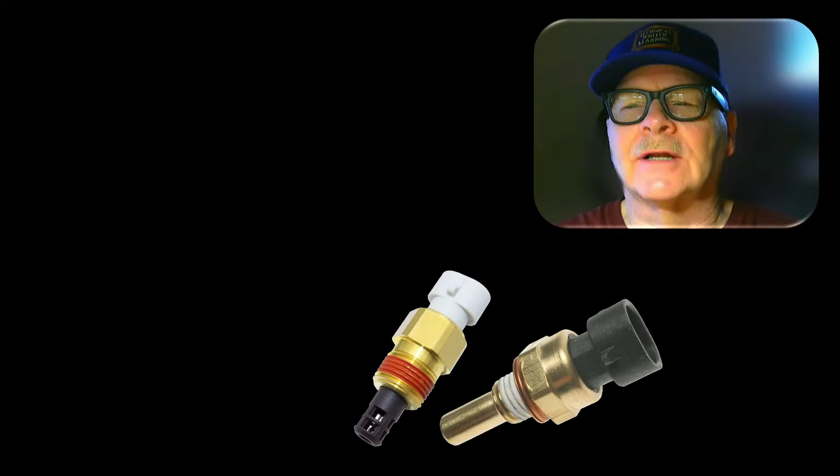Alright, we got question 1 here. Enhanced live data shows the IAT sensor reading 101 Fahrenheit and ECT reads 43 degrees Fahrenheit. The ambient temperature is 45 degrees.

What will the OBD2 generic data live stream display on the same vehicle for these two sensors? So basically what you're looking for, remember now, this is the enhanced, which is the OEM specific, and then your

OBD2, which talks on a different line and comes from a different ROM in the engine controller, is going to display something different. Your IAT is going to display 40 below zero in the OBD2 stream, but a substitution has been made up here, and that can actually cause wet spark plugs on a cold day. What's really interesting about that, if you got a situation like this on a hot day, it'll start normally

if the actual ambient temperature is close to this. But if it's a cold day and the coolant's reading 43, and this is substituted 101 for something that it feels like will probably work, it will wet the plugs and make a mess on a lot of these vehicles.

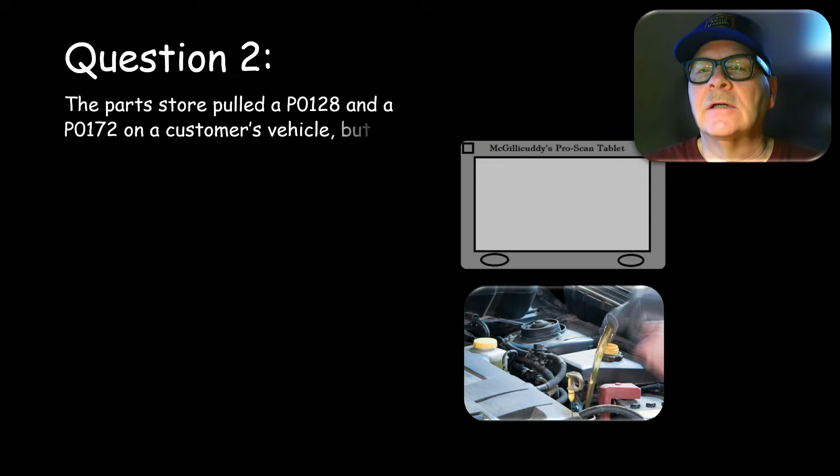Question 2. Part store pulled a P0128 and a P0172 on a customer's vehicle, but the customer decided to ignore the codes. Two weeks later, he changed the oil and filter but didn't do anything else. Immediately after the oil change, the engine wouldn't idle. He did everything right while changing the oil and didn't touch anything else.

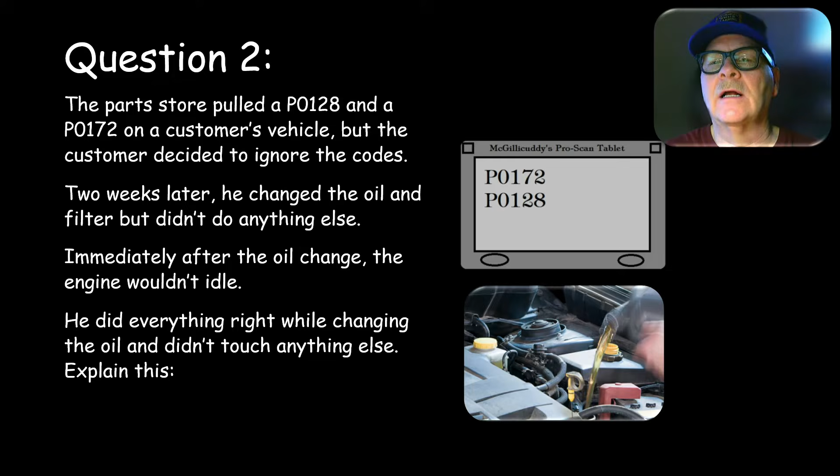Now, I've actually seen this situation unfold, and what happened there was the crankcase oil contamination with fuel due to the cold running engine. The PCV system was picking up enough fuel from the oil, so it had skewed the fuel trims badly enough. This was on a Chrysler, an early 90s Chrysler.

But the long and short of it was, all he did was change the oil after - the long story is, my dad called and said, I've got a power loss light flashing on your mom's Chrysler, and I went over and turned the key on three times and it flashed code 17. It meant it was running too cold, so I need to put a thermostat in it.

He said, well, I can do that. So he put a thermostat in it. Drove it for another week or two, and then when he changed oil, it wouldn't idle, because the fuel trims were so accustomed to drawing that extra fuel out of the crankcase that when the extra fuel wasn't coming out of the crankcase, it was like a carburetor out of adjustment, and it wouldn't idle.

And he called real frustrated. He goes, all I did was change the oil and now it won't idle, and I thought that was funny. I said, take the battery cables off. Ordinarily you have to clean the throttle body, but I said take the battery cables off. So he did that, and then when he put them back on, it idled just fine.

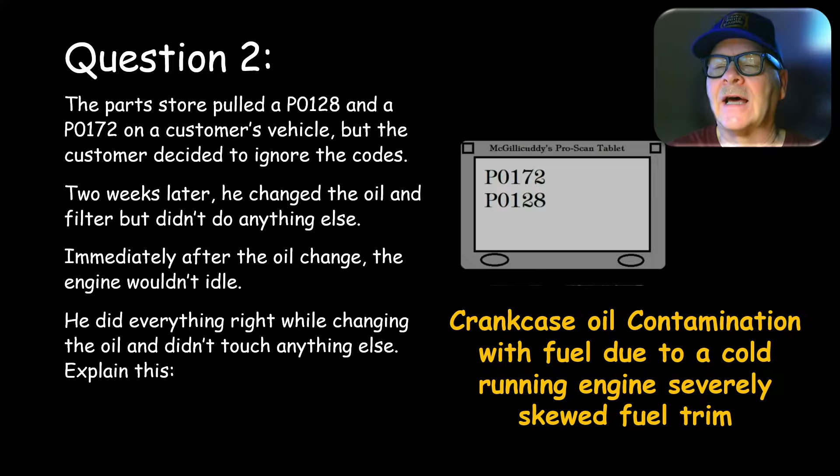Think about that. Formulate your answer in your mind. See what you see.

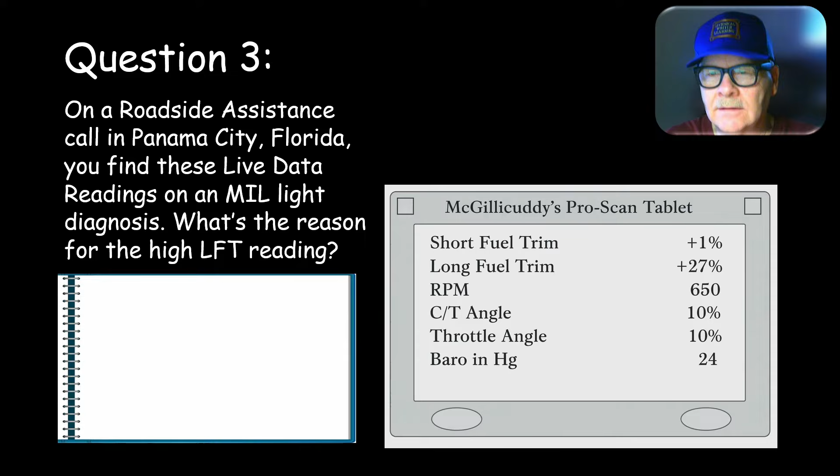Panama City is right there at sea level, right? So you got 29.98 inches of mercury there, and the Baro is reading 24 inches, which is high altitude. And so it's calculating fuel delivery for high altitude, and that's inaccurate for sea level delivery, but it doesn't know. So it changes its fuel delivery calculations for high altitude, but that's not enough fuel. And the oxygen sensors are saying, hey, what are you doing? And so they actually start sending - they drive the fuel trim up so that everything will stay in balance. So you got a skewed reading from your barometric pressure sensor.

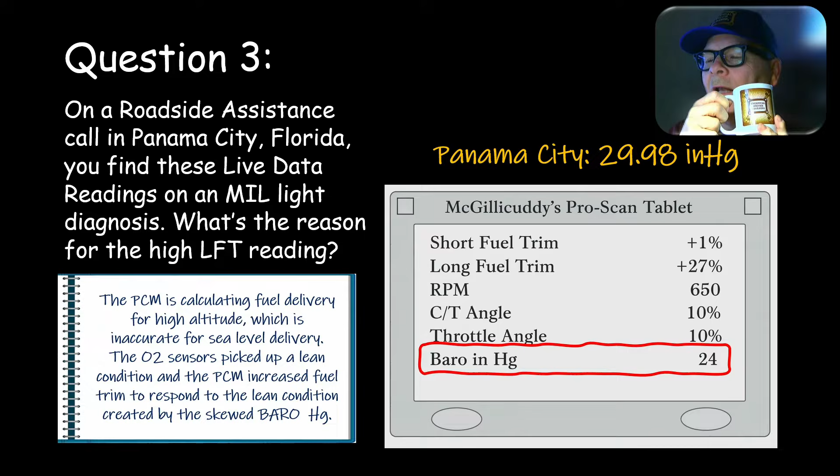Hold on a second. Oh, by the way, here's my coffee cup. You might like to see that, if you can see it. See my coffee cup? There we go. Look at that, it's got my logo on it. Anyway, there's only one of those, so don't get any ideas that I can send you one.

Alright, so the O2 sensors picked up a lean condition. The PCM increased fuel trim to respond to the lean condition created by the skewed Baro sensor.

And you understand what I'm saying here? Send me a question if you're confused about that.

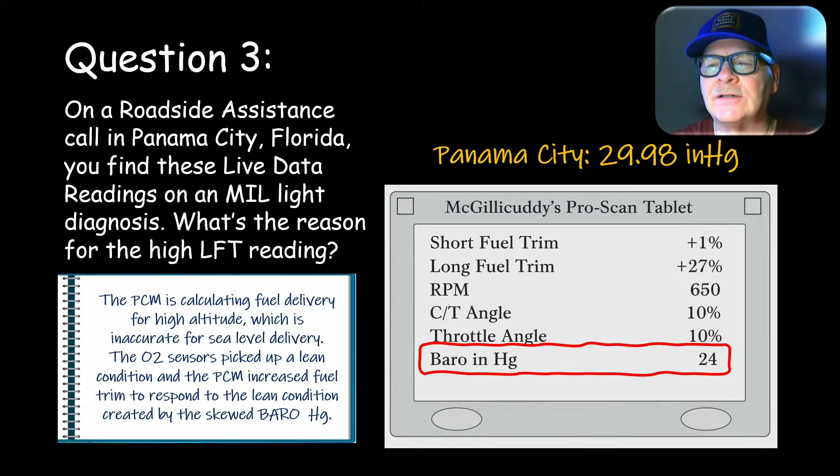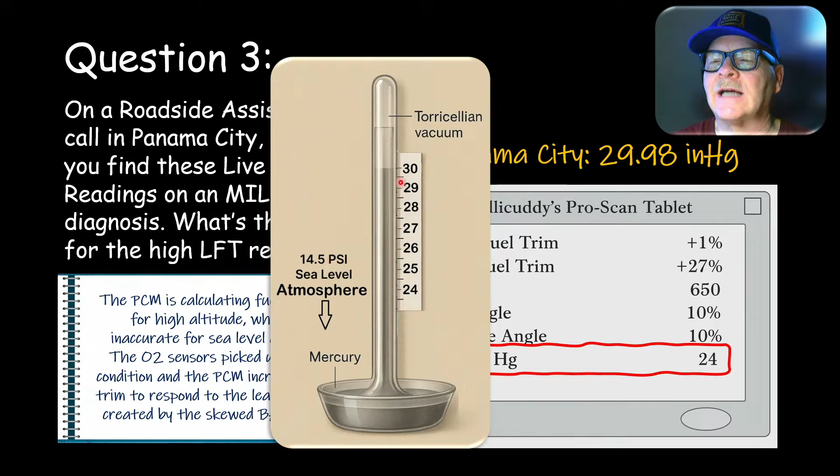This is basically, you got mercury, let's say it's a graduated tube here, there's a vacuum above the tube, and 14.5 psi at sea level is going to push this up. Notice this is roughly twice this - isn't that interesting? Anyway, it pushes that mercury 30 inches up in that graduated tube, and as the pressure decreases out here, that mercury goes down, so your readings are going to be lower. That's just the way that works.

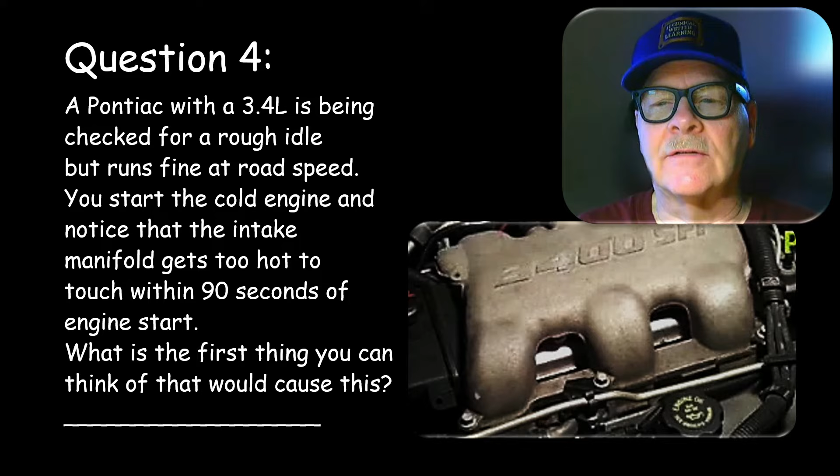A Pontiac with a 3.4 liter is being checked for a rough idle, but it runs fine at road speed. When you check the cold engine, notice the intake manifold gets too hot to touch within 90 seconds of starting the engine. What's the first thing you can think of that would cause that?

EGR flowing at idle. You got EGR flowing at idle, it's going to make the intake really hot.

I had seen this. I went to a tire store, and the guy that owned the tire store called me over, and he says, seems to me like they had to put an intake gasket on it or something, or an upper intake gasket, I can't remember. They had the upper intake off for some reason, and whoever owned the car had disconnected the EGR valve electrical connectors, because that was an electric EGR valve on that one. And they plugged them back in because they didn't notice they were unplugged, or if they did, they felt like, well, we need to put this thing back together right, so they plugged them back in.

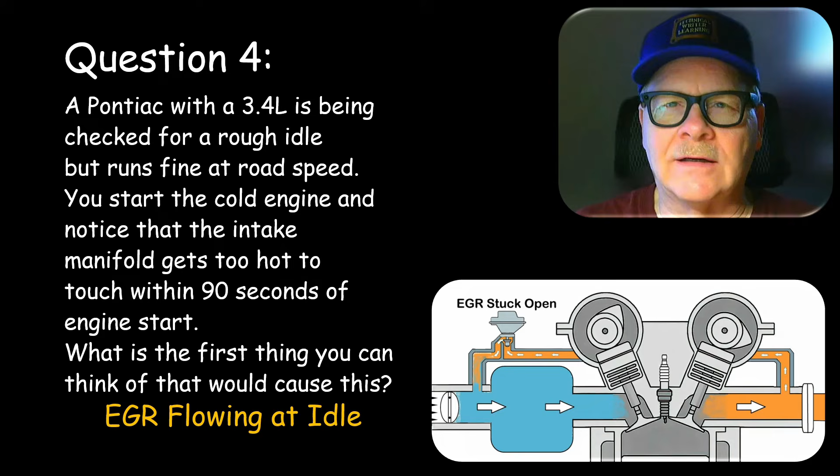And it idled really rough, and they were confused by that, so I went over there, and he said, let me walk out and show you this thing. It's been sitting out for 2 or 3 hours. So he starts it up, and I put my hand on the manifold, and it's idling rough, and the manifold begins to get super hot really fast. It was an aluminum manifold. And I said, that's going to be the EGR valve, and unplugged the EGR valve electrical connectors, and that took care of it. Now, I don't know why the EGR valve was being held open - obviously the engine controller was confused and was holding it open. And one way or another, he didn't care anything about fixing why the EGR valve was open. He just wanted it to idle smooth like it did when it came in for whatever other repair they did.

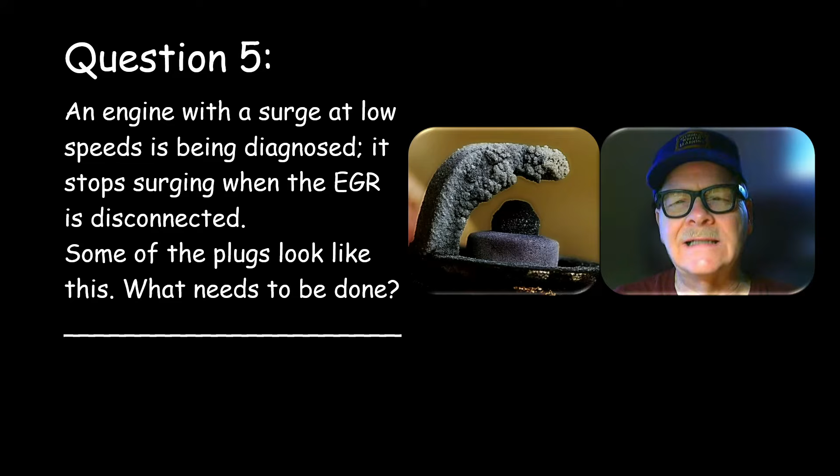Question 5: an engine with a surge at low speeds is being diagnosed. It stops surging when the EGR is disconnected. Some of the plugs look like this. What needs to be done? What do we need to do to correct this?

All right, what we got is leaking valve stem seals causing deposits to form on the spark plugs, causing random weak firing events. Now, if you have one that you park and it sits in the parking lot for, say, 30 or 45 minutes, and you crank it up and it fills the parking lot up with smoke, you got big trouble.

So that's a valve stem seal, that's what that is. If you let it sit and idle and it starts smoking at idle, it's a valve stem seal issue, particularly if you got puffy deposits on the plugs like these. The older GM vehicles used to be really bad to have valve stem seal problems, but the valve stem seal is right here, that's what it is.

Now, you're not going to have this problem on exhaust valve stem seals, because on an intake valve stem seal you have low pressure trying to pull oil past that seal all the time anyway. You got higher pulsing pressure in the exhaust going into the exhaust valve, so that one's not going to leak. As a matter of fact, you may even notice that some of your exhaust valve stem seals won't be the same type seal as your intake valve stem seals if you look at your kit. But one way or another, the seal is pretty important there.

One time we put some valve stem seals on a Dodge truck, and they happened to be crummy, cheap valve stem seals, and because of those lousy, crummy, cheap valve stem seals - where I did this at the college - they work their way up the valve stem.

Question 6: using the readings below, calculate the barometric pressure. Can you calculate the barometric pressure using these readings that you see here?

Let's see how I do this. 19.9 plus 9.7, and that equals 29.6. So that's your manifold vacuum and your manifold pressure, we talked about this on the last test. When you add these together, you're going to get your barometric pressure, whatever it is. That's typically the rule.

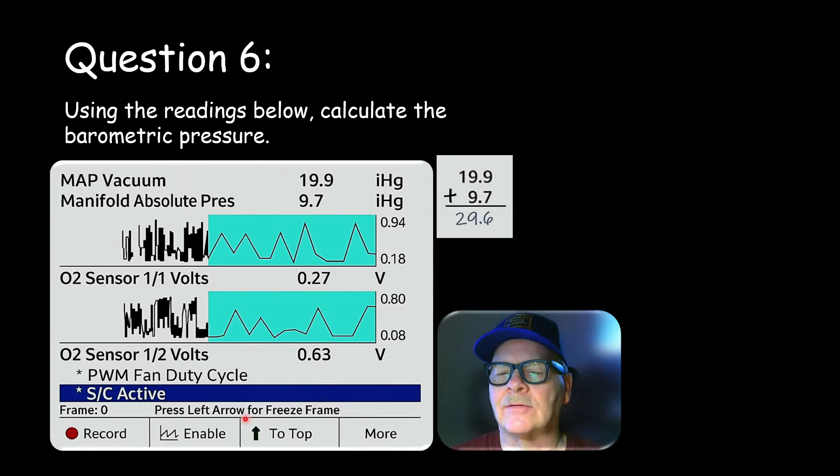Based on this live data, which emissions component is suspect? If you saw this, what would you think?

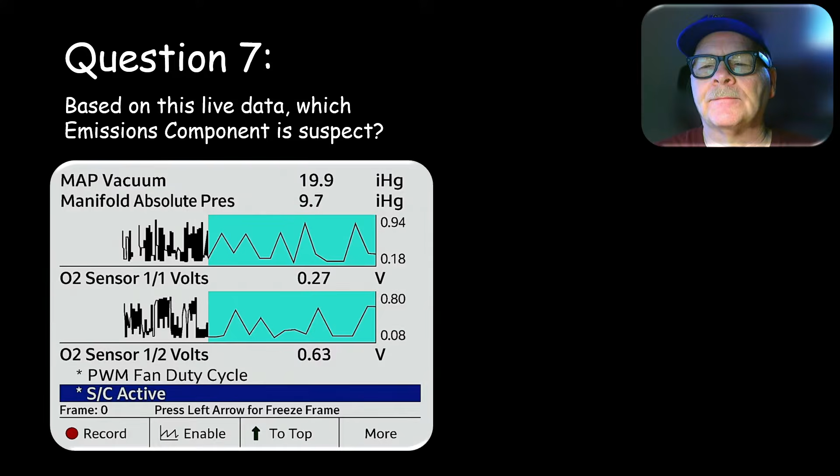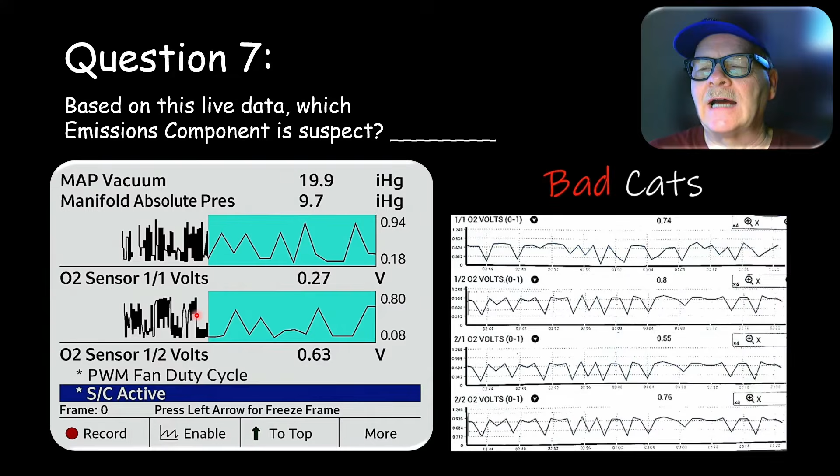This right here is in front of the cat, and this is behind the cat on bank 1. See that? Now, whenever there's a bad cat, the back sensor looks just like the front one, but when your cat's good, your back sensor will be lazy, like you see over here on that side.

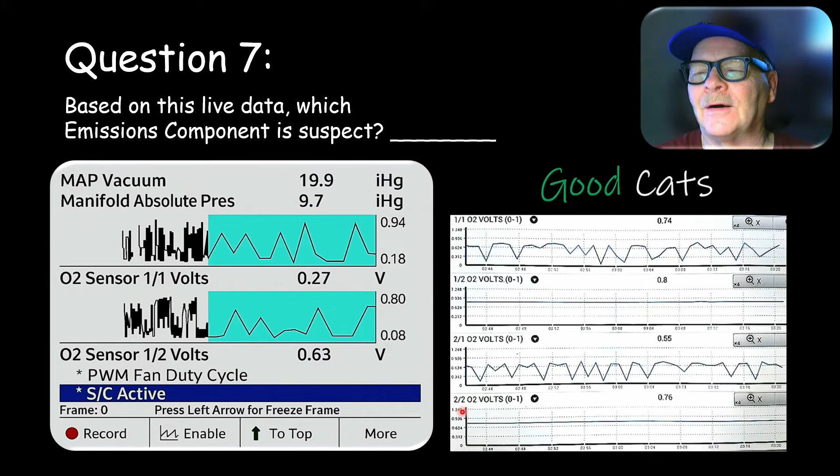I captured these on a Jeep that belonged to my doctor. He had bought this Jeep, a Jeep Wrangler, and he brought it in, and it was throwing codes for catalytic converters and all that. We took the catalytic converters off, and somebody had gutted them. These readings, as you see over here, came from that, and that was a pretty interesting deal.

The deal was, I was at an engine performance class at CARQUEST Vision one time, and there were two guys who were instructors in that class, and they brought this up while teaching. They had on their screen what they were teaching, the static and the idle, because sometimes these numbers will be skewed if you've got other problems than this one had. All they were teaching was that, and I was thinking, wait a minute, they're leaving out the snap part of it. I wasn't going to speak up, but some guy behind me said, hey, don't you have a snap reading you're supposed to get on that too?

And one of them said, wait a minute, did you see that on the advanced engine, on the L1 test? And the other said, oh, I didn't see that on mine. I said, well, I saw it on mine. You're supposed to snap it. Those guys were sure of themselves. I'm not saying anything against those guys, but that was something for some reason or another they had missed out on.

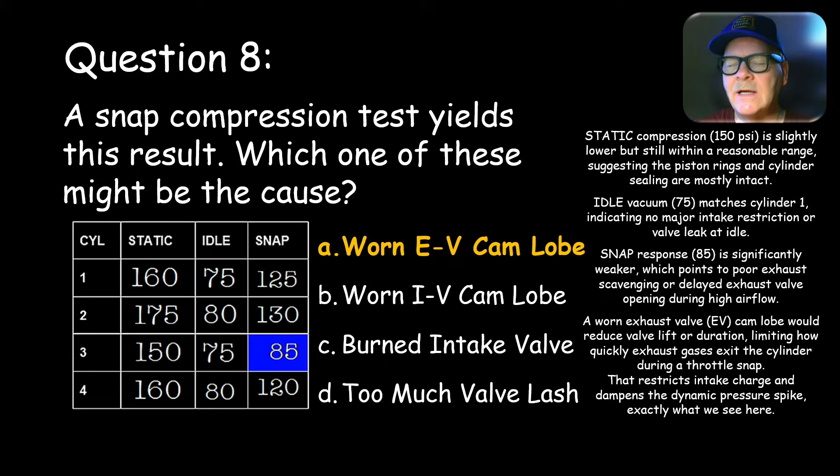What the deal is, the static compression is slightly lower but still within a reasonable range, suggesting the piston rings and cylinder seal are mostly intact. Idle vacuum matches cylinder 1 pretty much, so you've got no major intake restriction or leakage at idle. Snap response is significantly weaker, pointing to poor exhaust scavenging or delayed exhaust valve opening during high airflow. So there you go. You can read the rest of that text, but you see the point there. This is kind of how this works, so keep that in mind.

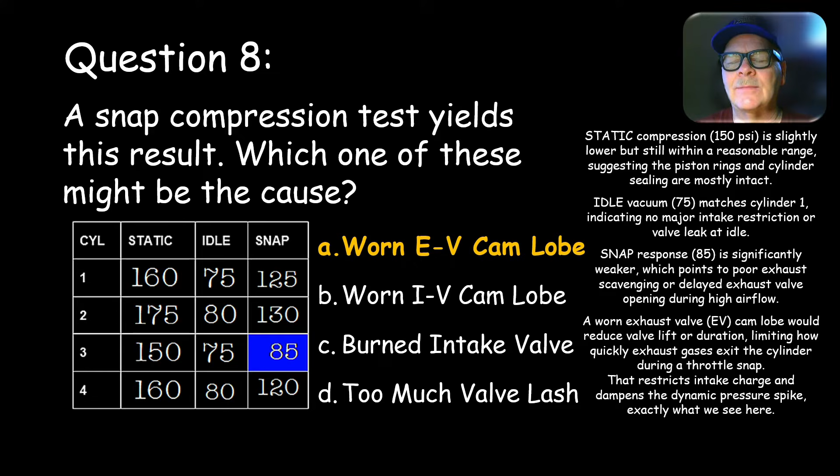The only car I had that would run at the time was an 87 Honda Accord, and it had been sitting there. He asked if I had any car that would run, and I said yeah, an 87 Honda Accord, but that's the only one I got. So I pulled that little car around, and he hooked up the Snap-on scope to it and looked at that wave pattern.

He says, let's check the compression. He looked at the back and it was smoking a little bit. He checked the compression and it was really high. He says, this thing is a tooth off, the cam's advanced a little bit. I said, really? Looking at that waveform, the smoke, and the compression, he gathered that information.

Based on these waveforms, how many cylinders does this engine have? Carefully look at that waveform, look very carefully at it. How many cylinders does it have? Not too hard to figure out.

It's got 6 cylinders, and the firing order on this one is 1, 2, 3, 4, 5, 6, like it is on a lot of your GM V6s. Look at number 4, the coil pulse is right here, lined up with that particular compression stroke. It's basically a relative compression test.

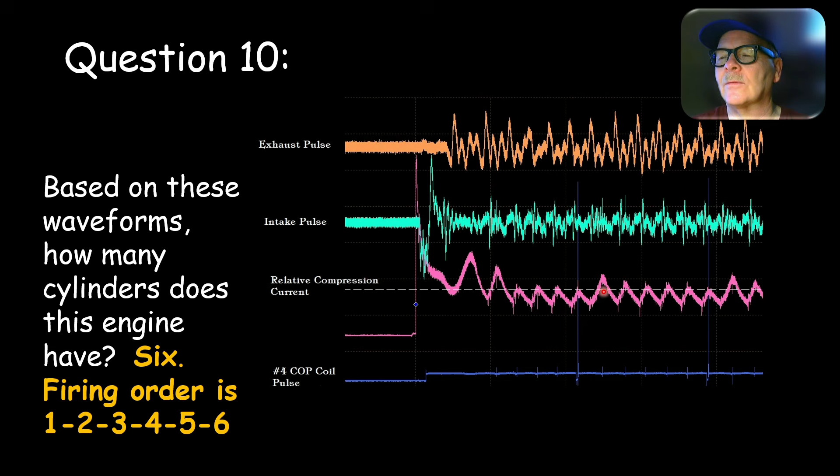You can do that with voltage or amperage, it works either way. I've got this BT608 tool from Autel that will do a relative compression test, it's got software built in for that. Pretty cool tool, pretty pricey, but really functional. You can count the pulses between these tall peaks too, 1, 2, 3, 4, 5, 6, so you've got 6 cylinders there.

If you know the firing order, you can look at this and see which one is pulling. All the compression's a little low except for number 5, so that probably means this engine is slightly out of time, only decent compression on one cylinder. You'll get some skewed readings at the very beginning as momentum builds, but if it's got some compression on all cylinders, but more on just one, that typically means the timing belt is out of time.